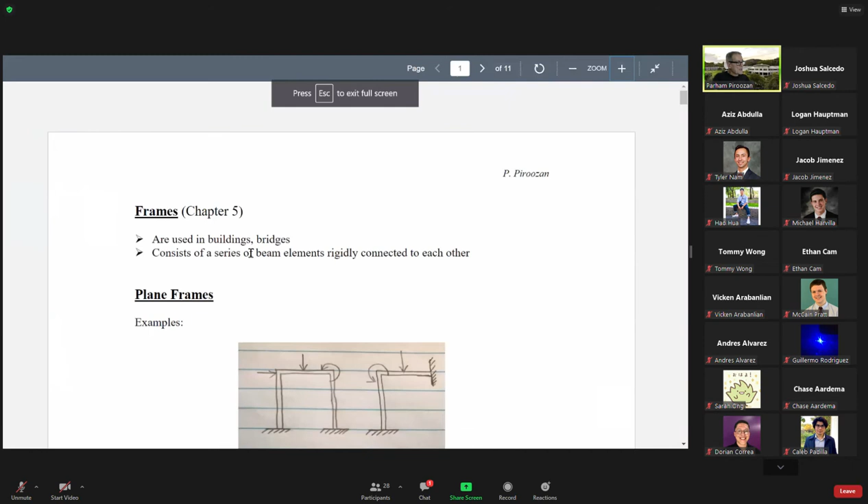So with this, let me go to modules. For this week, we have this, which is frames. That is what we are going to discuss today.

Examples are in buildings, bridges. What are they? Well, these are beams which are rigidly connected to each other, either welded or bolted. If it is bolted, of course, we can dismantle; disassembly is possible. But if it is welded, then we cannot dismantle this; it would be destructive dismantling of course. So this is a discussion sometimes in the civil engineering department, whether they want structures to be welded or bolted, where we add a gusset plate and then bolt them together.

More heavy duty loadings, you can apply the load anywhere. Unlike, for example, trusses where we are limited to applying the load at the joints, at the pins, here we can apply the load anywhere, moment or any type of loading, anywhere on the structure.

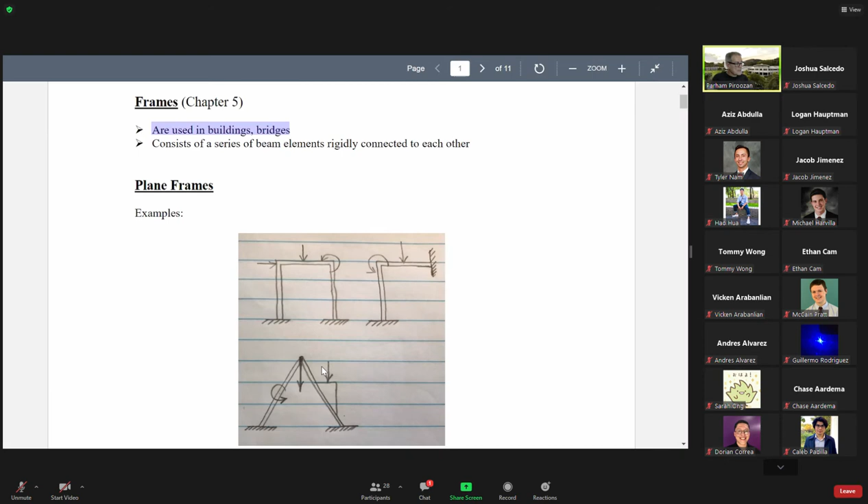If this load is in the plane of this frame, then it is called a frame simply. But if this load is perpendicular to this plane that you see, to the plane of this structure, then it is called a grid.

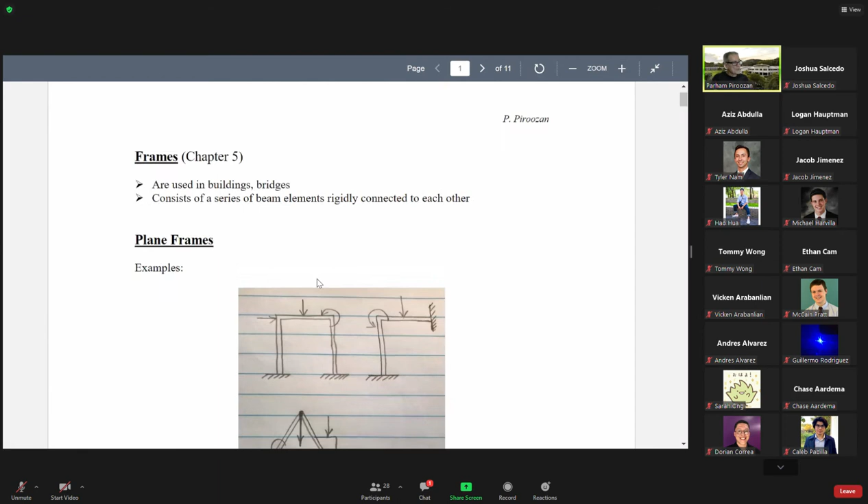So by frame, we usually mean that these loads are in the plane, but if it is perpendicular, it is called a grid. Today, we are going to look at finite element formulations for frame problems and look at an example problem. In the lab, we already used these frames, so today we are going to look at the formulations of what it was.

This has a lot of similarities actually with the method that we did for the derivation of trusses, the same pattern. This is one of these members.

It is oriented at an angle theta. We always measure theta counterclockwise positive. So this is positive.

Two coordinate systems are defined. One here, xy, this is the global coordinate system, and x prime, y prime, this is the local coordinate system. This coordinate system is attached to the element, goes from this node to this node.

Now, at each node, we have 3 degrees of freedom. We are applying a force in the x prime direction, call it F1x prime. A displacement associated with this force is U1 prime. There is a force also in the y prime direction. It is called F1y prime.

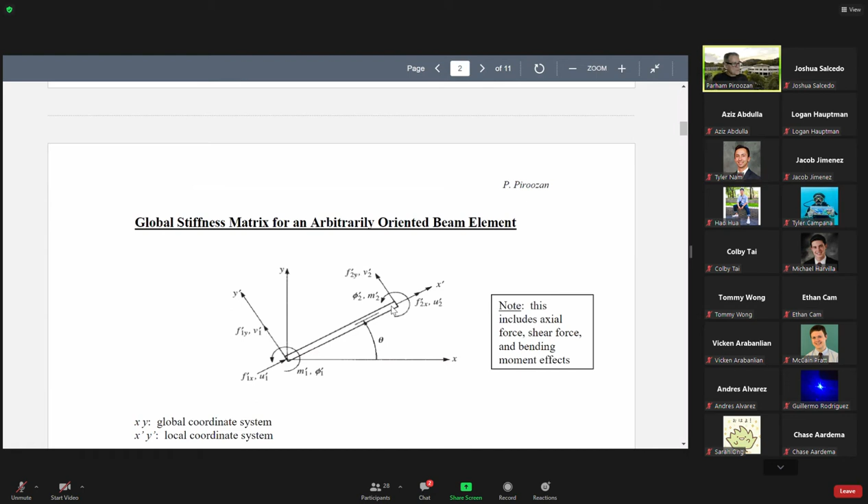You said 3 degrees of freedom per node, and there are 2 nodes. So our element stiffness matrix would be 6 degrees of freedom, 6 by 6. So it would be a 6 by 6 matrix.

This is for all beams in this section. This is, of course, we are talking about frames, but in general, yes, actually beams also, but in the finite element formulations, we consider 2 degrees of freedom: displacement, for the formulation, we did displacement in the y direction and also rotation. If you look back to the derivations for beam problems, we consider displacement in the y direction and rotation.

because this axial we had already done. So in our formulations, we didn't consider this degree of freedom, but we added this later. After we did our formulations for beams, then we added this one because this was for a bar subjected to axial loading. So we added this degree of freedom later. But in our formulations for beams, we consider 2 degrees of freedom, displacement in the y direction and rotation. But we added this one later. So yes, there are 3 degrees of freedom per node

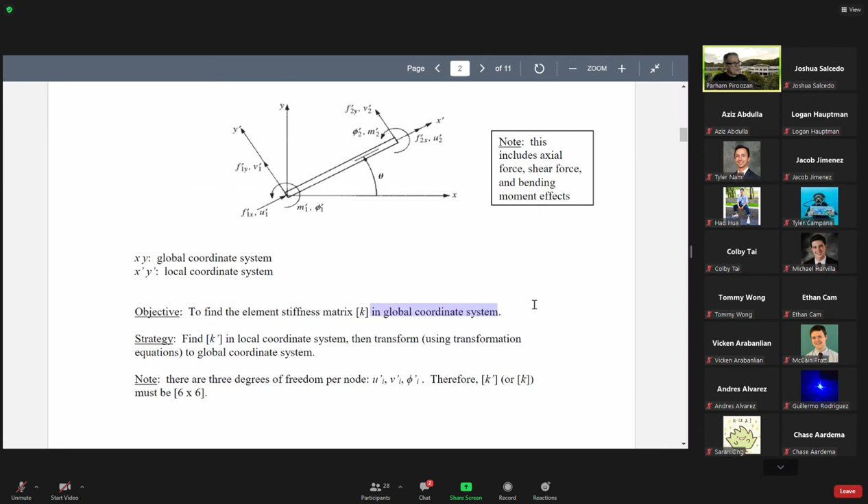for frame problems. Now, our goal is always, the objective is always to find the element stiffness matrix, element stiffness matrix, but in global coordinate system. We don't want it in local coordinate system, we don't want it in x prime, y prime coordinate system. We want it in xy, in global coordinate system.

So again, as usual, as what we did for trusses, we find K prime. Everything with prime, it refers to local. Everything without prime, it refers to global coordinate system. So,

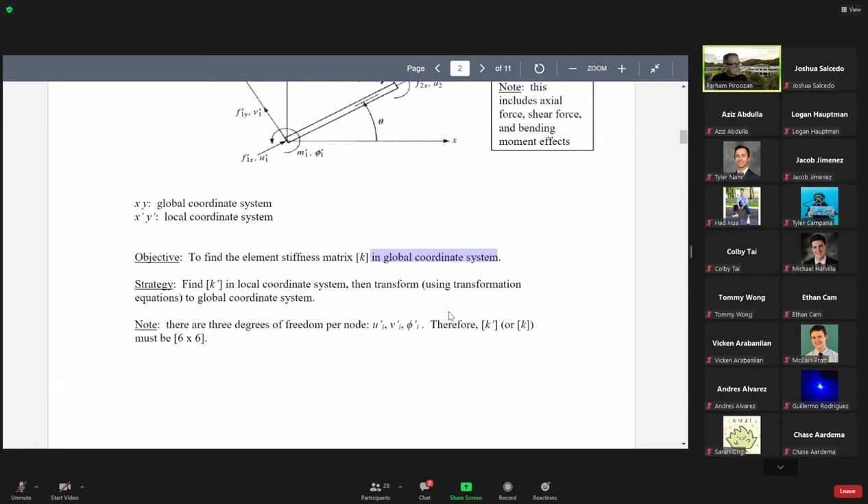well, in order to do this, let me see, I have this one. Our formula, as we can write, this is actually a beam element. So we can just write it F prime is K prime D prime in terms of its local coordinate system, the same as what we did for beams. But everything here is with prime.

We don't want this prime. We want to get rid of this and write it in global coordinate system. It means without these primes. Our job is to find this K prime, drop this prime and make it K. So we want this K actually.

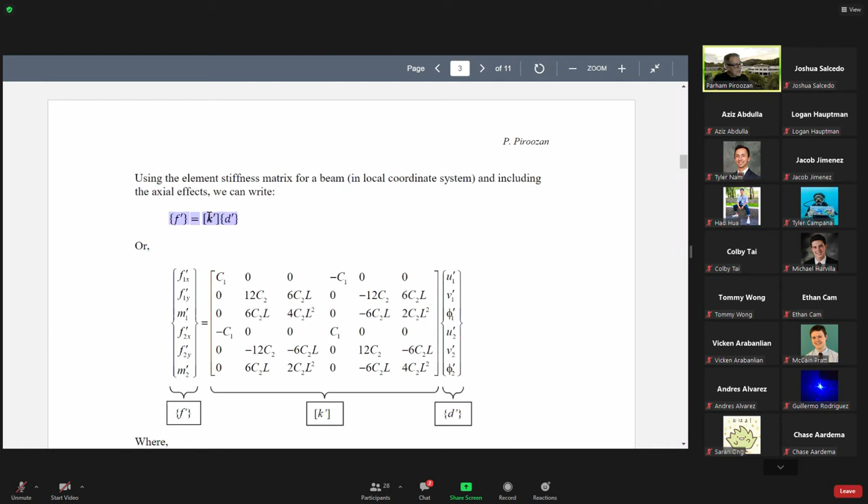So in order to do this, well, let's first use this formula that we have in local coordinate system. This is F prime is equal to K prime times D prime. F prime is forces in the force vector in local coordinate system. It is F1X prime, F1Y prime, M1 prime, and the same for node 2.

This is our element stiffness matrix in local coordinate system. Remember, for beams, we already did this before. It was, remember, EI over L cube. But here we are just simply adding F1X prime. So we are just adding this one. This is for node.

This would be U1 prime, V1 prime, phi1 prime, U2 prime. So as you see here, we are doing C1 minus C1 minus C1, C1. And then we have our C2, which refers to that beam EI over L cube that we derived before. But C1 is AE over L. So these are the substitutions we are using just to make it simpler. C1 is AE over L, and EI over L cube for C2.

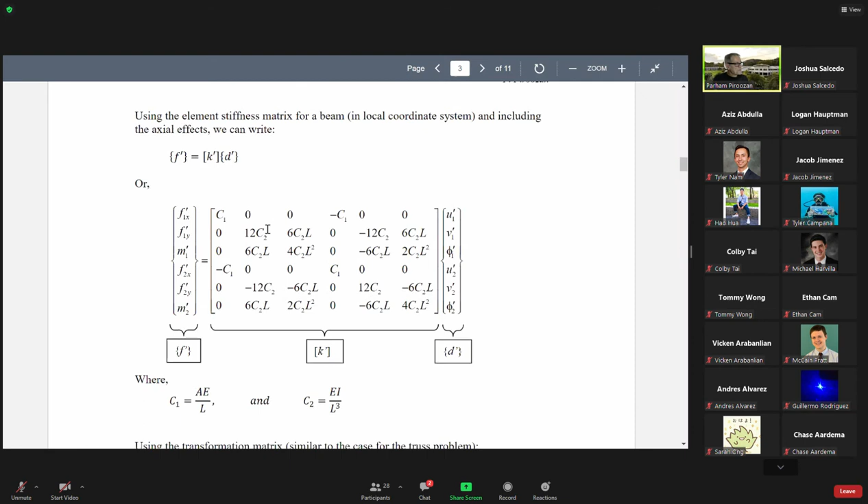So this would be the transformation matrix for these elements. Using this one, make this substitution here. You see, for F prime, use TF. For D prime, use TD. So we are getting rid of these primes. So let's do this: F prime is K prime D prime. For F prime, use TF, for D prime, use TD.

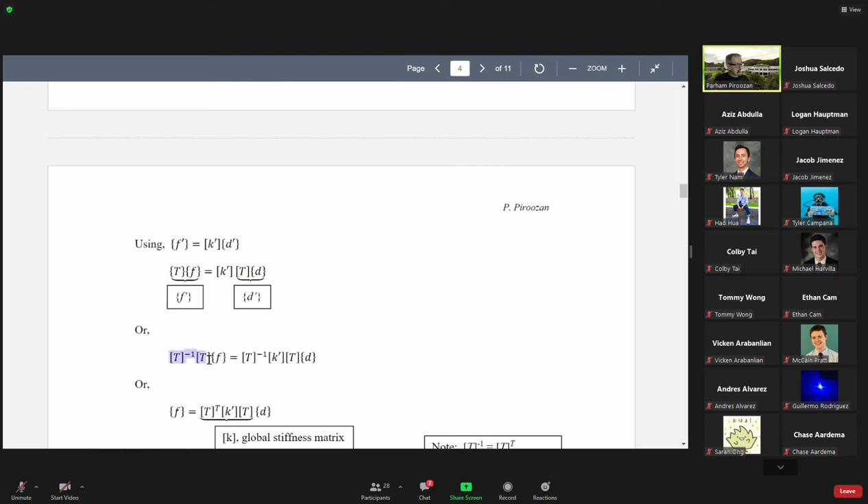That's what we get. Now, multiply both sides by T inverse. So this is T inverse TF, and this is T inverse K prime TD. This T inverse times T is what? Anyone? What is T inverse times T? Identity matrix. It's identity matrix. Very good, yes, it's identity matrix.

So we can just remove this one. So we have F is equal to T inverse K prime T D. But this T inverse, we don't like this inverse here, because inverse of a matrix is always some problems, because it's very time consuming. Finding the determinant, let's say, even with a 100,000 by 100,000 matrix, inverse is, if even the determinant is zero, then it causes ill conditioning and singularity.

So very time consuming also. But the good thing is that inverse of T is the same as its transpose. Remember, in the first activity, we did it for a simpler version of T, a 2 by 2 matrix, but it's the same thing. So this is orthogonal, this property is called orthogonality property. So we drop this inverse and write it as T transpose K prime T, and this is D.

That is our formula: F is equal to something multiplied by D. This something is called element stiffness matrix in global coordinate system. That's what we wanted: it is T transpose times K prime times T. That is what it is here.

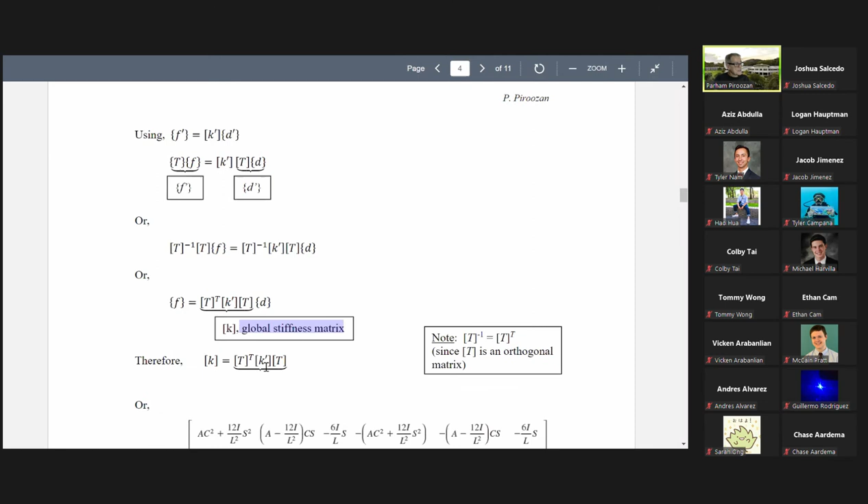Now, what is this T transpose times K prime T? We have everything here. This is T, so transpose of this one, times K prime. This is K prime, we start, this is K prime here, this. Times another T, here we find element stiffness matrix to be given by this.

We said this is a 6 by 6 matrix, and it is a 6 by 6 matrix. This is 1, 2, 3, 4, 5, and 6. And this is symmetric, so we are not rewriting this piece here, but we use this symmetry. Very important in finite element formulations and solutions. Symmetry always plays an important role in reducing the number of computations and memory usage. So this is what we wanted.

E, modulus of elasticity, length of the element, area, cosine of the angle that this member makes with the global coordinate system, I, area moment of inertia, sine of the angle, and everything else, area, cosine, I, sine, and everything else we can find.

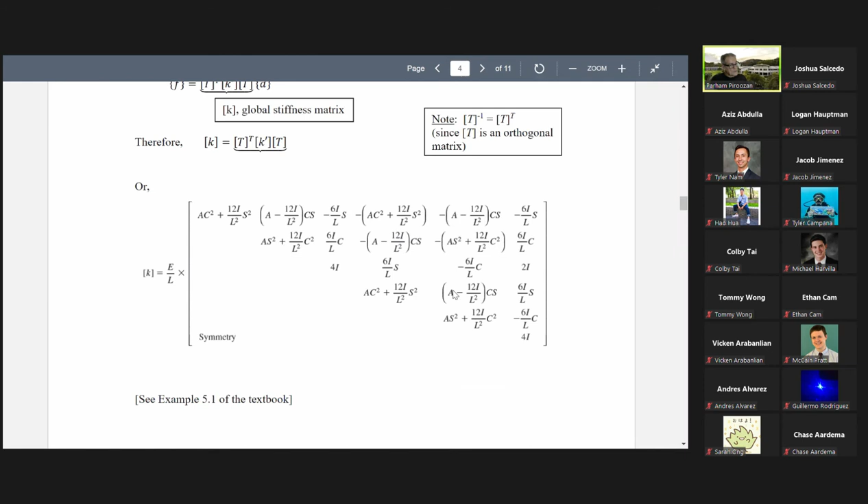And use this one. Once we have this in global coordinate system, we put them together by direct stiffness method to create the global stiffness matrix and then solve for displacements. All right, that's all I wanted to discuss. The rest is now solving, looking at an example problem. Any questions before looking at this example?

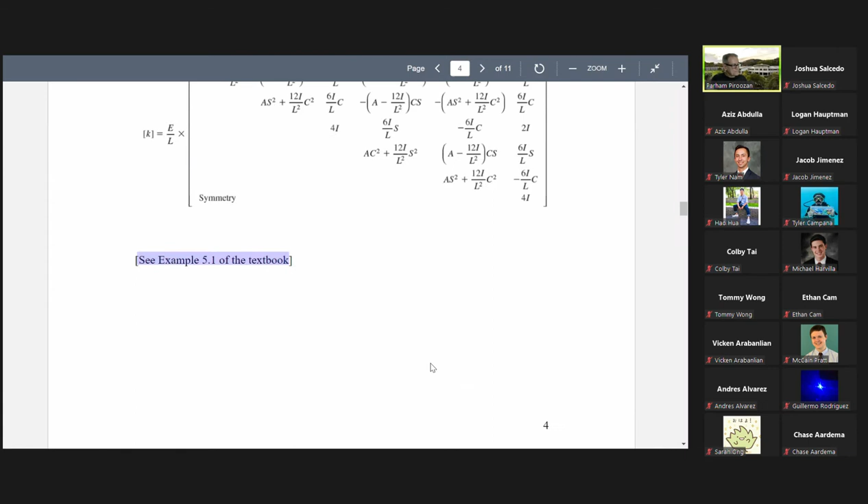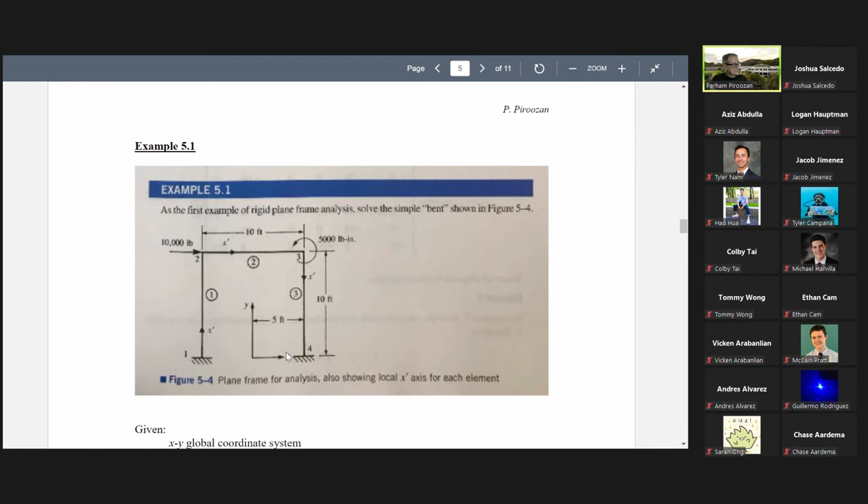No questions, so let's look at this example problem here. Node 1, 2, 3, 4. This is a frame like this. 10,000 pound force here, moment applied here. 4 nodes and 3 elements: element 1, element 2, element 3. X, Y, this is our global coordinate system.

This is subjected to these loadings. The question is, we are given XY global coordinate system, E modulus of elasticity is given, area, I for elements 1 and 3. So this element 1 and 3, I is 200. For element 2, this is 100 inch to the power 4. So this area moment of inertia.

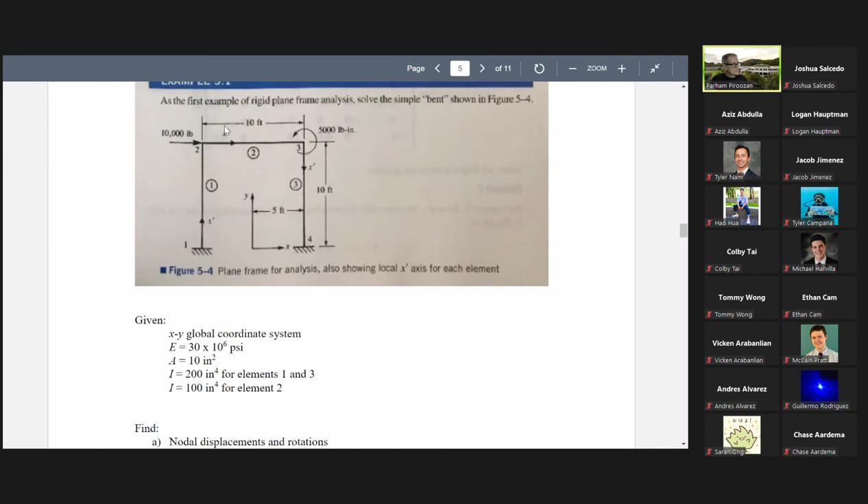So this is the frame. The question is to find the nodal displacements and rotations, and also we want to find forces and moments in each element.

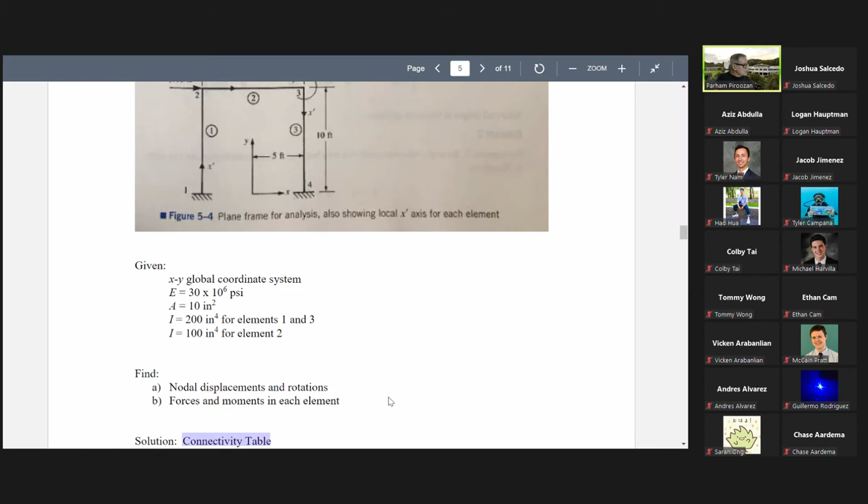To solve this problem, the first item is to create the connectivity table. Have your paper and pencil ready. I want you to be active, use your time here. Write this down: connectivity table. You have 1 minute. Create the connectivity table and let me see what you do.

All right, let me also, I have this camera here. This is node 1, 2, 3, 4 here, and we have the connectivity table. Node, we have here element, node I to node J, and angle theta.

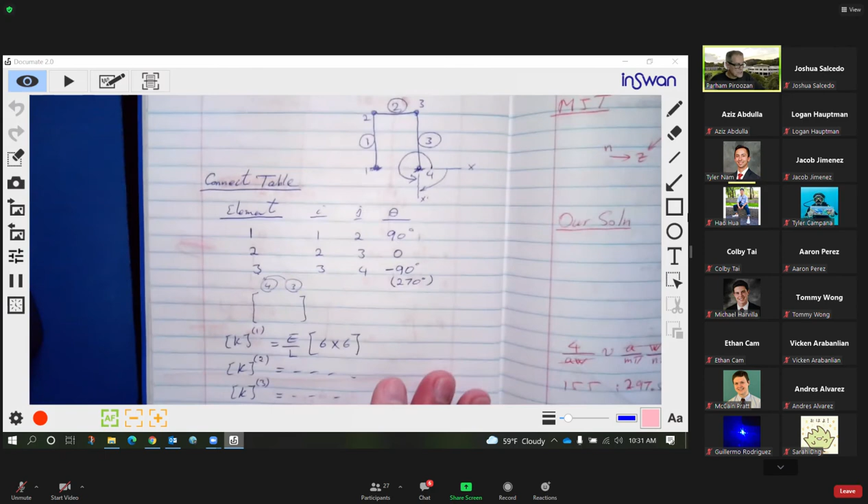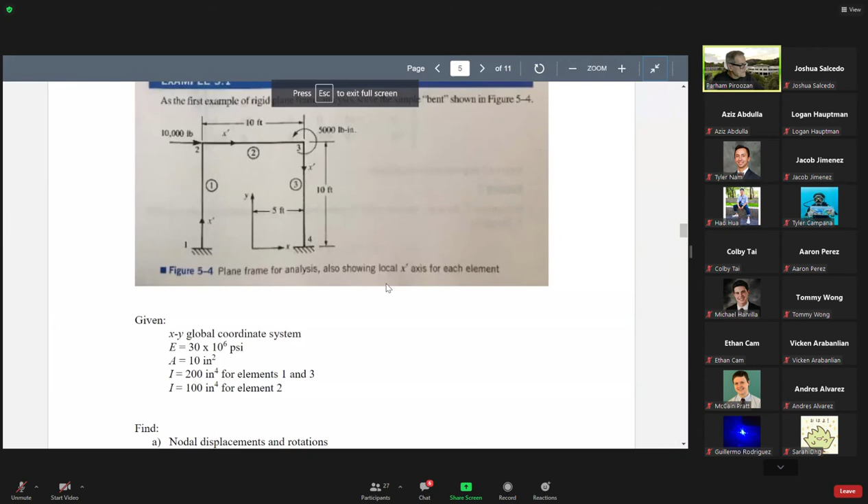All right, let me go back to Canvas, and now we know where we are going. So that was the connectivity table. We talked about this. I used 270 degrees or negative 90, the same thing. We need to, for each element, element 1, this would be K1.

All of these parameters, angle theta for element 1, we said it is 90 degrees. So cosine of 90 is 0, sine of 90 is 1. And we have everything else. We can create K1, degrees of freedom, write them down here so we know the addresses: U1, V1, Phi1, U2, V2, Phi2. This is the global element stiffness matrix for element 1 in global coordinate system, of course.

This is this one. Do the same thing for other elements. For element 2, we said theta is 0 degrees, cosine 0 is 1, sine 0 is 0, and other parameters, this is K2, degrees of freedom from node 2 to node 3. Element 3, theta is negative 90 degrees or 270 degrees, cosine is 0, sine is negative 1. This is the stiffness matrix for element 3 in global coordinate system, degree of freedom from nodes 3 to 4.

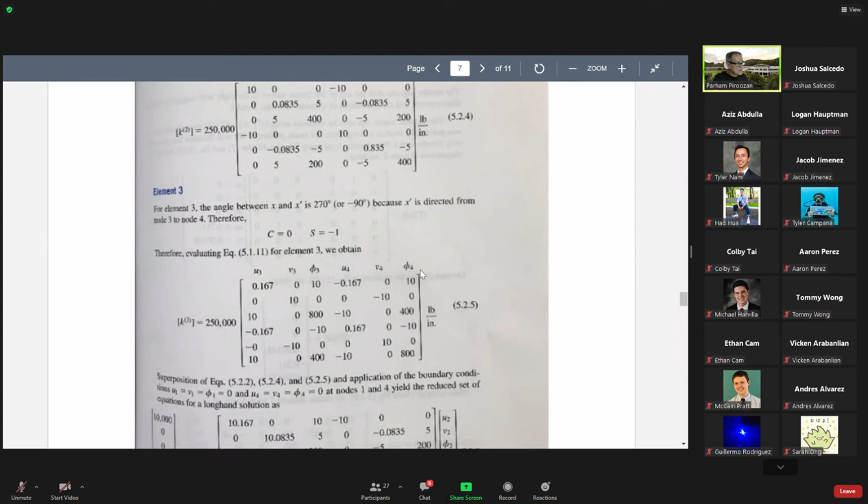And then the global stiffness matrix would be, as what we discussed, 12 by 12, but it's a very large matrix to write. We can apply also boundary conditions: U1, V1, Phi1 are 0, and U4, V4, Phi4 are 0. These are the 2 fixed nodes, and applying them, we get this one.

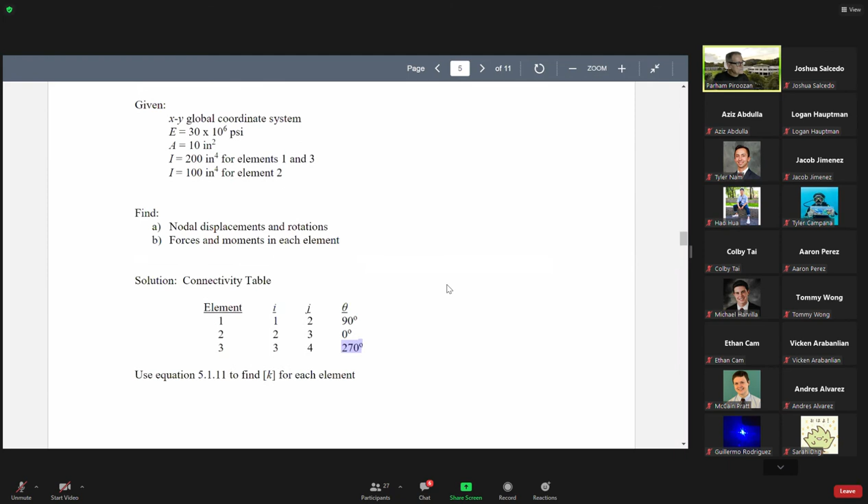Now, I need to write the force vector for this problem, at node 2. This force is positive or negative, I should write in the force vector? Positive. You're right. This is to the right, according to our sign convention, it is positive.

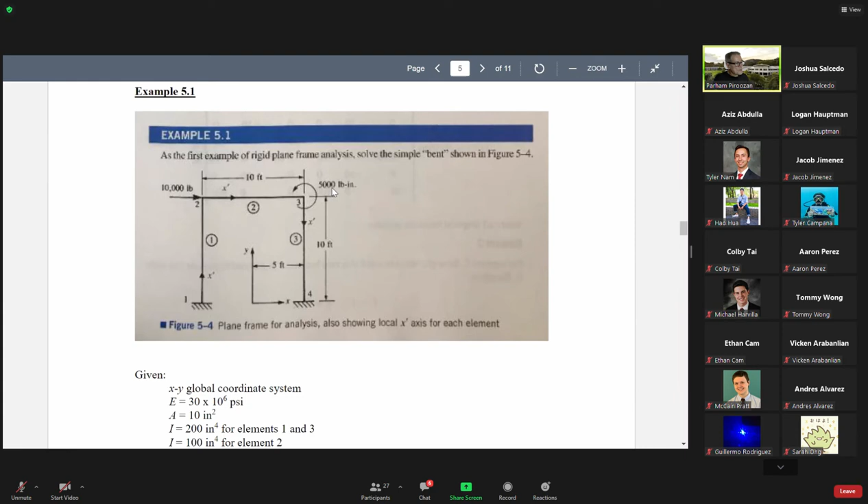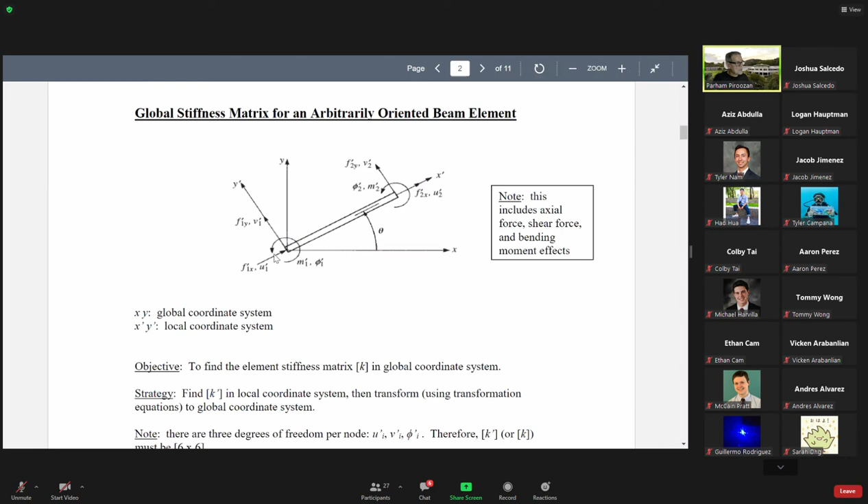This moment, should I write it positive or negative? I believe positive, because it's counterclockwise. You're right, it is counterclockwise positive. According to our sign convention, always for beams and frames, counterclockwise is positive. So yes, this moment which is counterclockwise is positive.

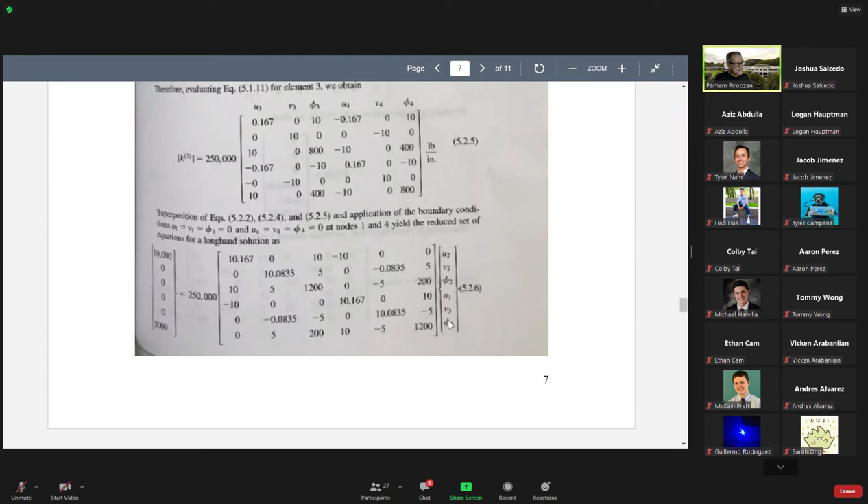Therefore, plugging everything in, this is 10,000 pound force that we are applying, everything else 0, and there is a moment of 5,000 pound inch. This is the system that needs to be solved for these displacement vectors, 6 of them: U2, V2, Phi2, U3, V3, Phi3. Solving, that is what we get. These are the displacement and rotations at this node.

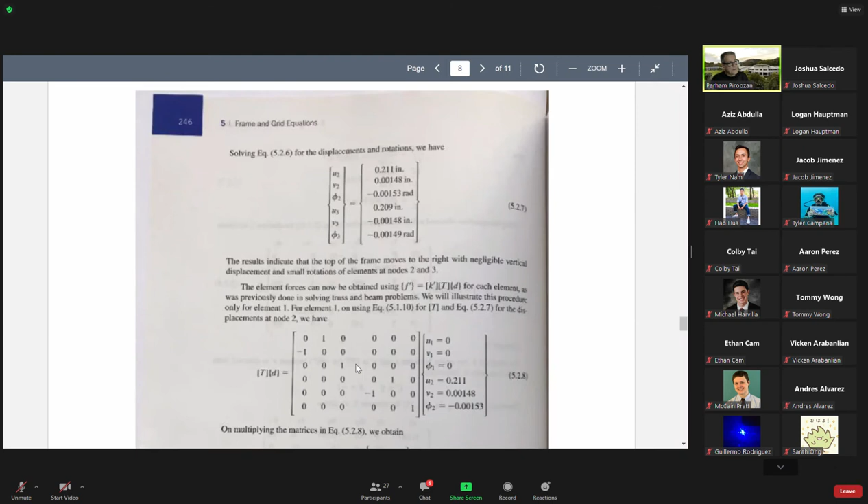That's part A of the problem, finding displacement and rotations. Next step is to find the forces and moments in each element. Once we have this, everything else is now post-processing, not a big deal. But remember, again, like what we did for trusses, we need to find the displacements in local coordinate system to be able to find the forces and moments in each element, because forces and moments in each element are written in terms of local coordinate system.

But these displacements are in global coordinate system, so we have to find them in local coordinate system. We can do this easily. TD, remember we said D prime. Let me go back and show you. Remember, this is D prime equals T times D.

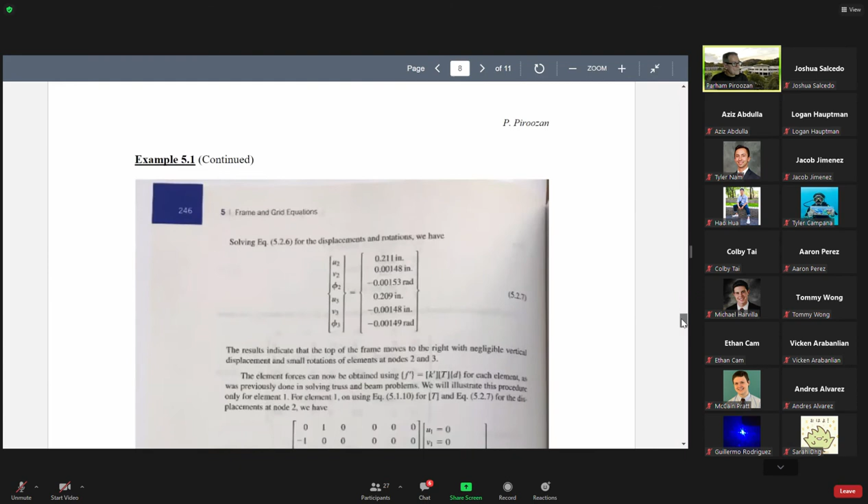We found the displacement in global. This is the transformation matrix. Multiply, we get this displacement in local coordinate system. So here it is. This is the transformation matrix for element 1.

Theta is 90 degrees, so cosine 90 is 0. So this is 0 and sine it is 1. So this is the transformation matrix, and displacement, it goes from node 1, it is fixed, everything is 0, and node 2 that we have, for node 2, we have the displacements here. So these 3 items...

...go here. These are the displacements in local coordinate system, and then now multiplying it by K prime, TD, this is TD, K prime element stiffness matrix in local coordinate system. It is this one, multiplied by these displacements in local coordinate system. Here we find forces in element 1 to be like this.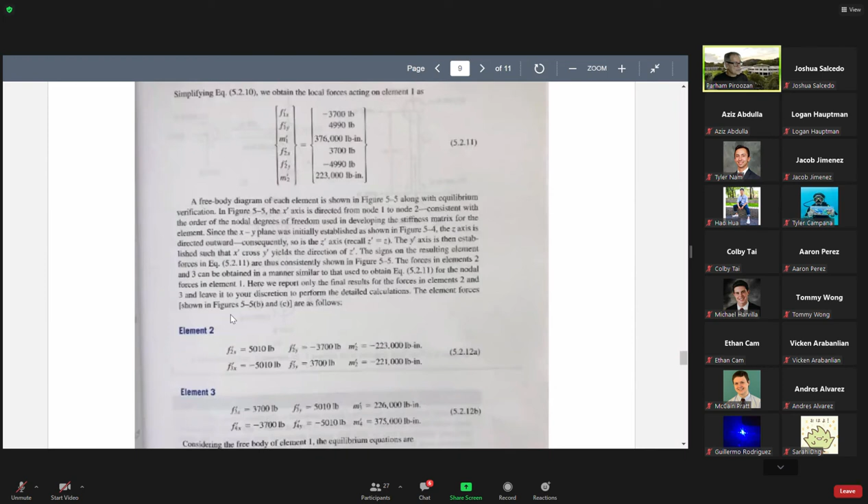This is F1 X prime, F1 Y prime, M1 prime, F2 X prime, F2 Y prime, and M2 prime. Everything you see in terms of primes, these are in local coordinate system. Do the same thing for elements 2 and 3, not a big deal. The same procedure. We have the displacement for element 2 and element 3. Similarly, we get these forces and moments in elements 2 and 3.

Now, a very important question. Any questions you have? Because I have a question for you. Any questions you have?

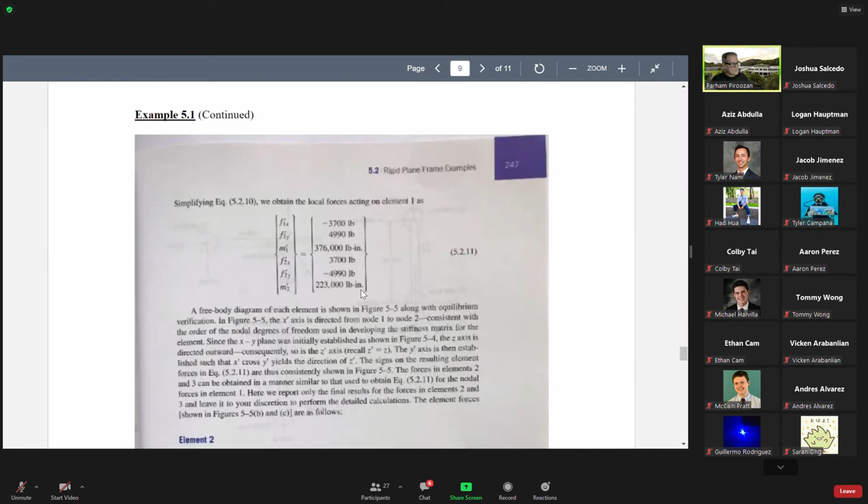All right, no questions. What I want you to do, very important practice here, you have your paper and pencil. These are the forces in element 1. I want you to draw element 1 and show these forces acting on element 1.

In practice, in industry, we do these things, and then we need to show them on the free body diagram, and then we send it to other departments. Let's say we send it to civil engineering so they can design the foundation, because node 1 is attached to the foundation, so it is attached to a support. They need to use this to design the foundation, the pedestal, and the reinforced concrete to handle this load.

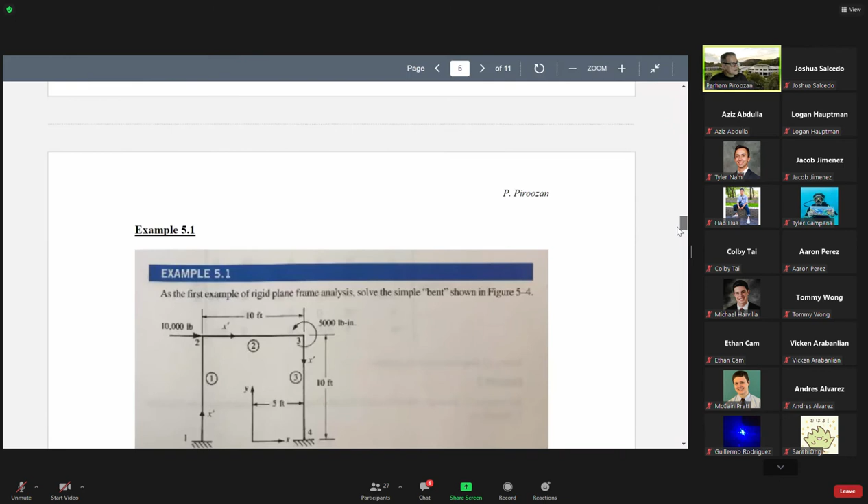I need you to draw this element 1. This is from node 1 to 2. Draw this element, just element 1.

Do we include the 10,000 pound force acting at node 2? No, this is at the node here, not this one. This is just the element itself. This element is attached to the node. This load is at the node. So just draw this free body diagram of this element.

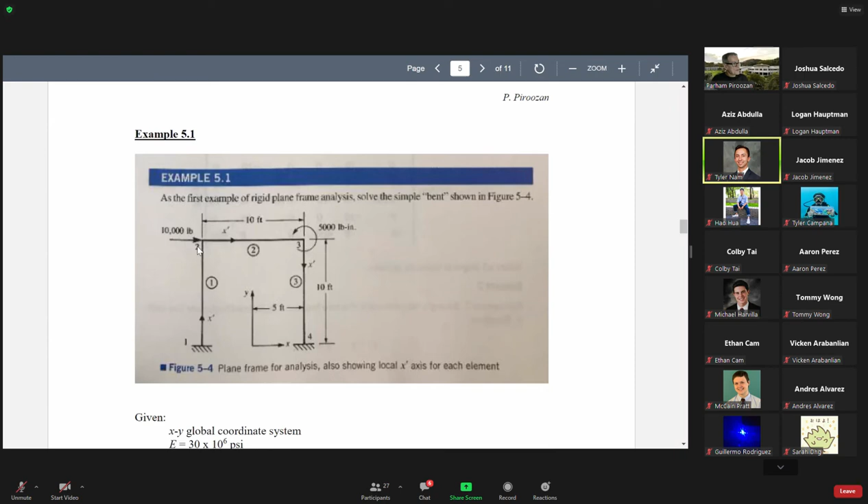Node 1 to 2. And show these forces that we found acting on this element. Show them here, because then we have to make sure that equilibrium is satisfied. Important practice, 2 minutes, show all these forces. Let me see what you have done.

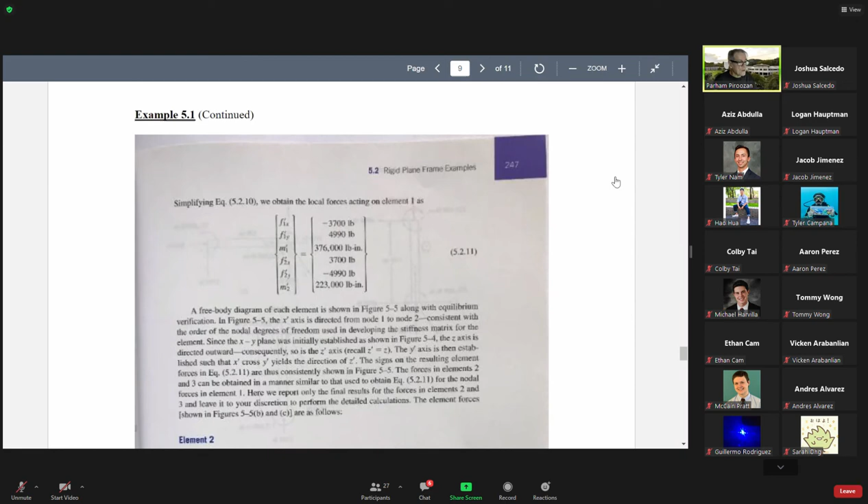All right, I have to show the camera. Now, this is for node 1, node 2. Well, I cannot show the numbers and the camera at the same time, only one at a time. So let me, you have the numbers. Let me see, what did we have for F1x prime? We got negative 3,700.

You see, this is node 1, node 2, and this is our x prime axis. Do you see it? Now, our x prime axis is going upward, and this is our y prime. Remember, this is in the local coordinate system. So this is 1, 2, this is element 1. F1x prime, we found negative 3,700 pounds, along our x prime axis. Upward is positive, so this is 3,700 pounds.

It is the force. F1y prime is positive to the left here. We got 4,990, so there is a force of 4,990 pounds. And there is a moment of 376,000 pound inch. What do I do, clockwise or counterclockwise? Which one should I do? Counterclockwise, very good, because our sign convention is counterclockwise positive. So this is 376,000 pound inch.

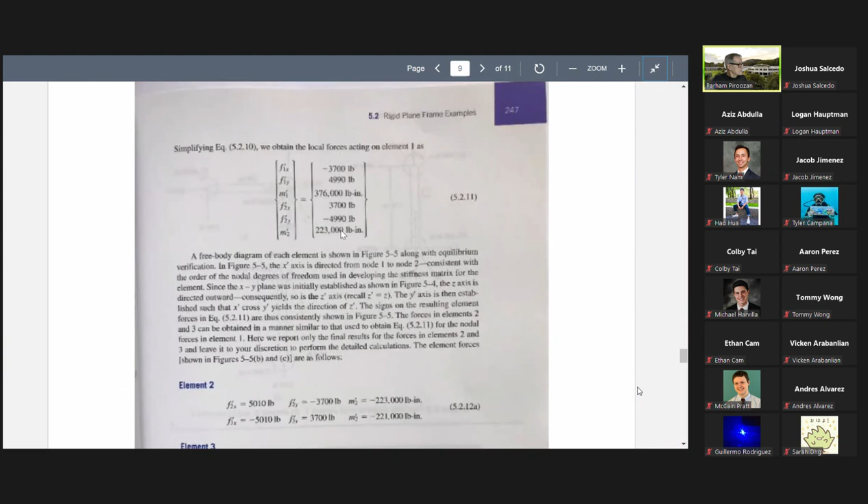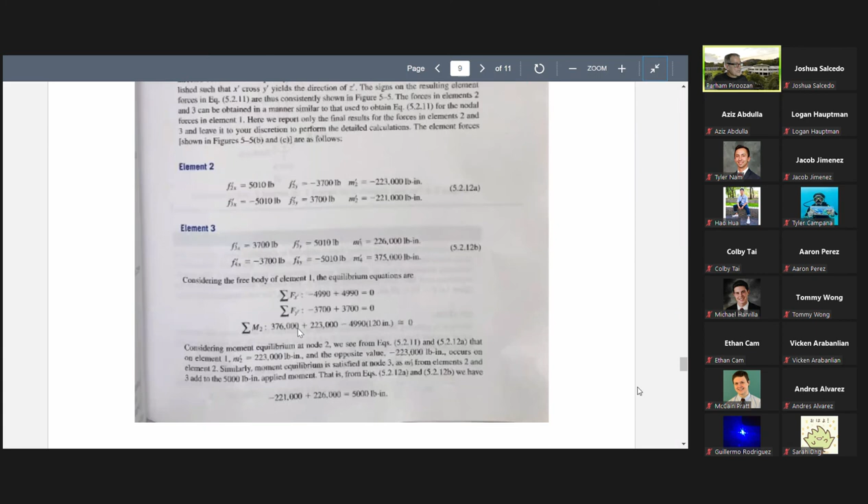Do the same thing for elements 2 and 3 - the same procedure, we find forces and moments in elements 2 and 3, and then also check equilibrium is satisfied, like what we did for element 1.

And these are also shown here - these are the forces and moments actually in element 1, this is for element 2, and this is for element 3. So we have all of them here. I think in addition to all of this, I added one more item here: equilibrium of node 3.

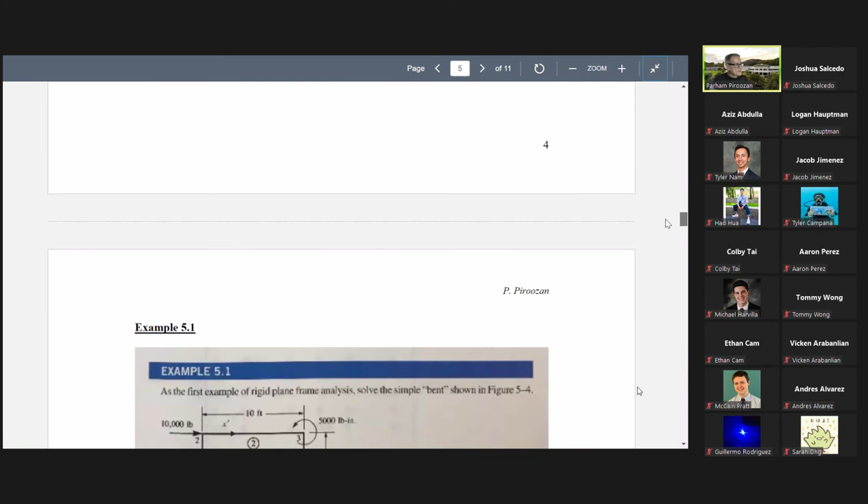What we looked at, we showed the equilibrium of each element, but for node 3 - if you go back, node 3 is here, connecting element 2 and 3. So this node 3, some part of this comes from element 2, some part of this loading comes from element 3. So when we want to draw the free body diagram of the node itself, there is a moment, concentrated moment.

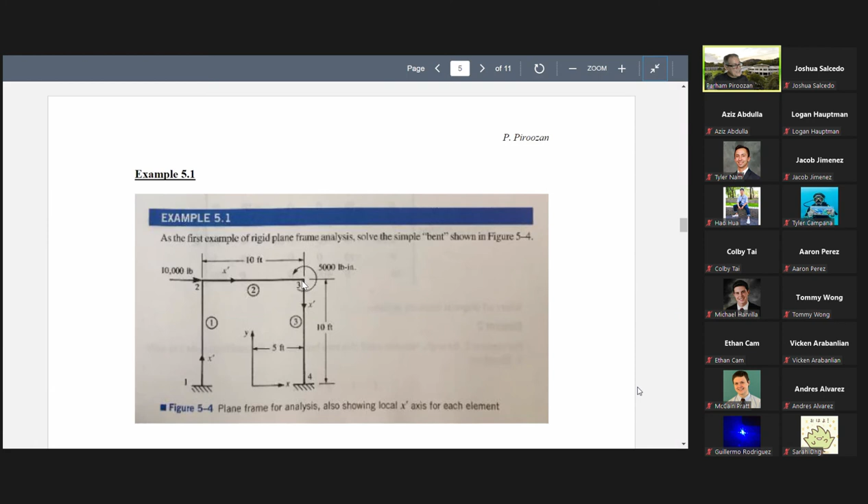At the node, we need to show this 5,000 pound inch, and the forces and moments in each of these two elements. But pay attention, the forces we showed were the forces that the node applies to the element. So the element applies forces and moments in the opposite direction to the node.

So here, going back to this, first of all, this was a concentrated 5,000 pound inch moment. Now, from element 2, I have shown it in red, for element 3, it is in blue. For element 2, these are the forces and moments.

Look at element 2, for example. This axial force is 5,010 pounds, to the left. This is the node applying this force to the element. The element applies the same force but in the opposite direction to the node - so 5,010 would be to the right now. This is what this element is applying to this node.

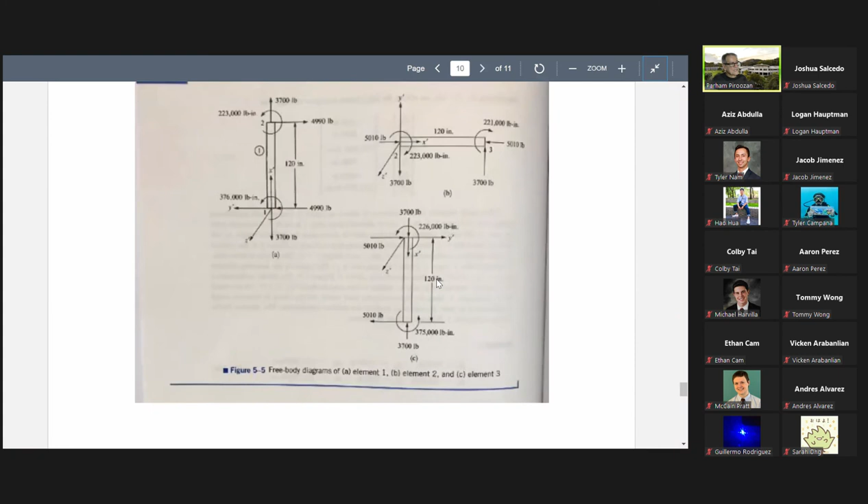And the same, for example, here, there is a force of 3,700 pounds that the node is applying upward. So this element applies in the opposite direction, 3,700 downward to this node. And the same for moment - let me also show you.

This moment is clockwise, 221,000, so it would be in the opposite direction - 221,000, but counterclockwise - that this element applies to this node. I showed it at a distance so it is clear.

The same, if you look at element 3, these are also the forces and moments that element 3 applies to this node. So, one minute - check, is equilibrium satisfied here? Is node 3 in equilibrium?

Yes. Anyone agrees with your friend? Yeah, it is. You are right - in the horizontal direction, 5,010 to the right, 5,010 to the left, the same amount, 3,700 and 3,700, and for moments, 221,000 and 5,000, both counterclockwise, making 226,000. With this 226,000, yes, it is in equilibrium.

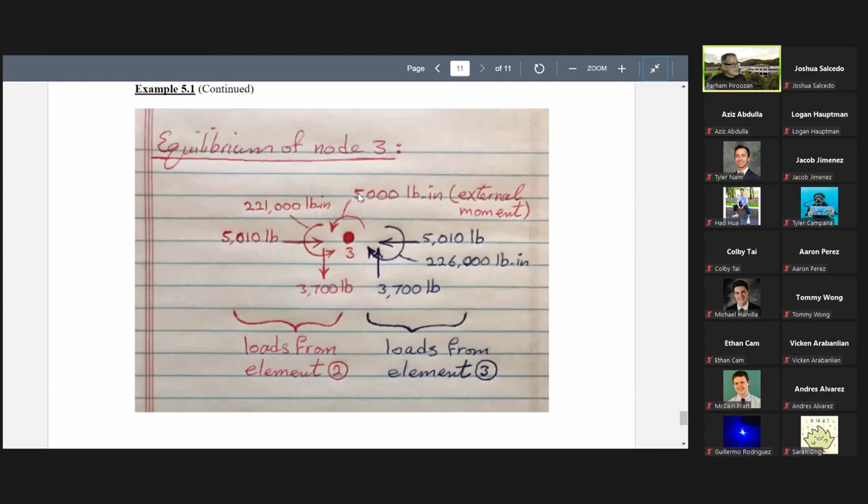And these are also the forces that act on node 3. I just wanted you to pay attention to the forces at the node and also for the elements. All right, any questions, anyone?

For element 2, if we tried to do this, would we have to include the 10,000, for node 2? That's right, good question. Yes, for node 2, you need to include this 10,000 applied to the node - so you apply it to the node and then make sure equilibrium is satisfied.

You want to do this? That would be your practice right now - draw node 2, and show all the forces acting on it. This would be 10,000 - this is node 2, this is 10,000.

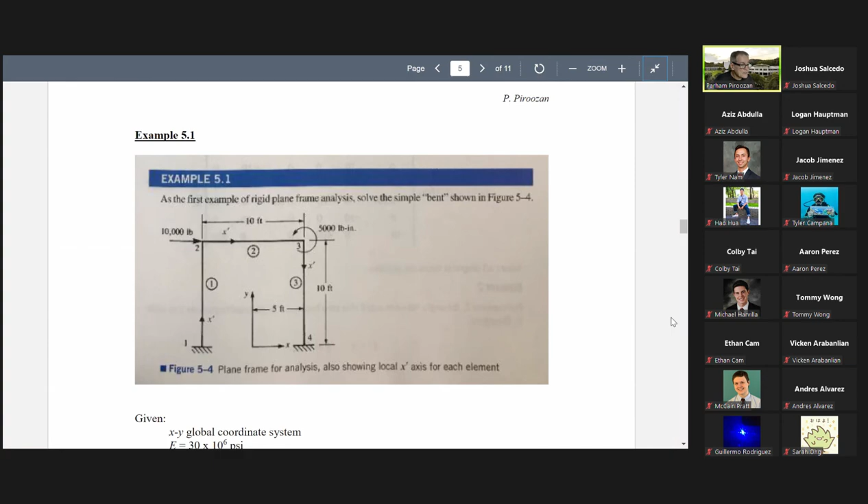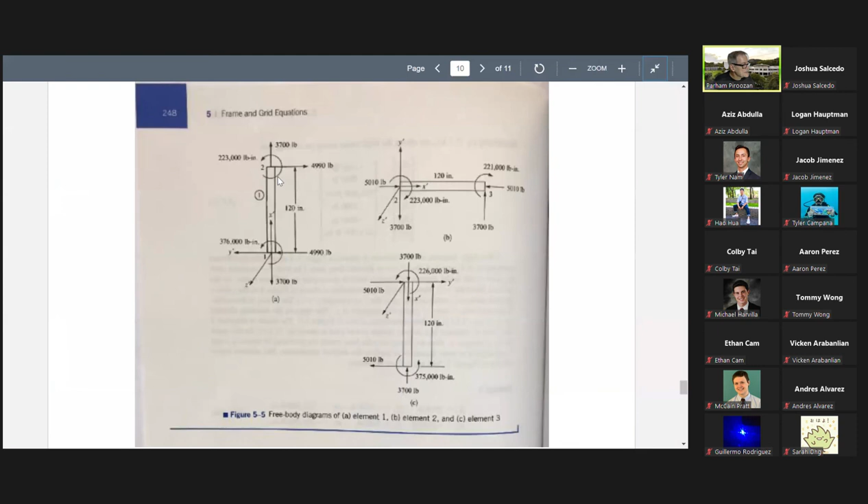10,000 pounds is applied here. This goes from element 1 and 2. Look at these items, 2 minutes. Draw the free body diagram of node 2.

Draw free body diagram of node 2, show all the forces acting on node 2. All right, 2 minutes. Let me show my camera. This is 10,000 pound force. This is node 2.

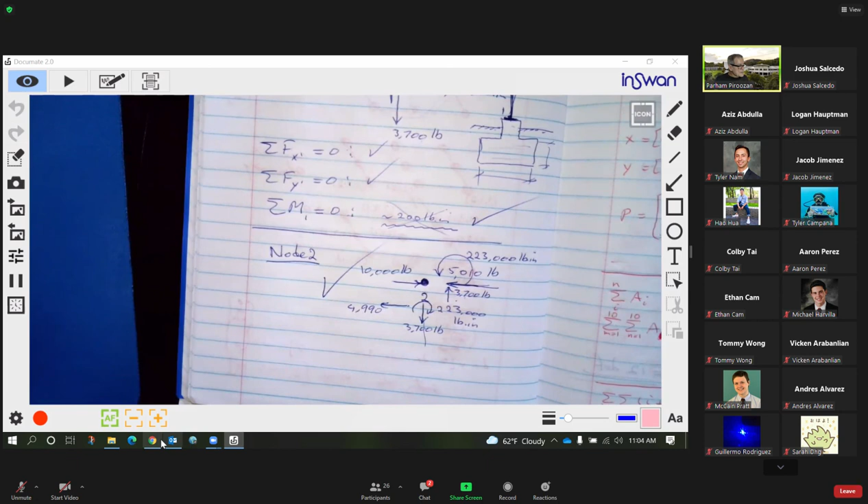Let me go back to the canvas. That was our discussion. I think I don't have anything else on frames. Any questions about what we discussed today?

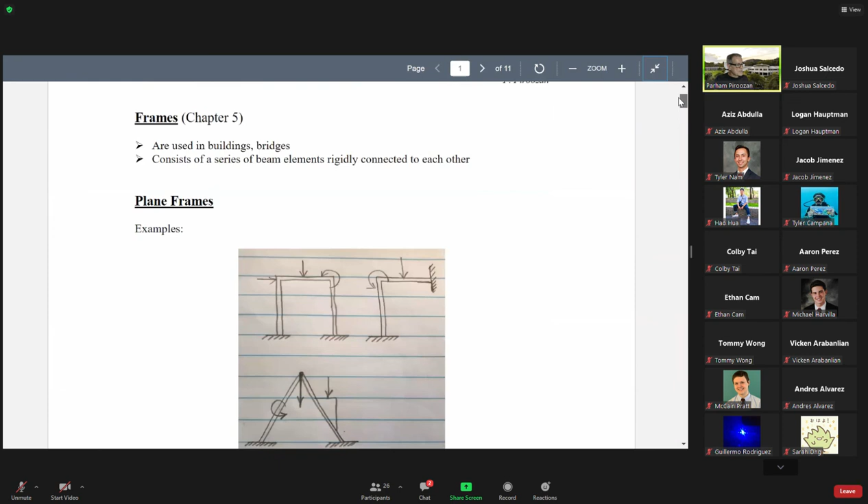No questions. You see, all of these that we were discussing so far were line elements: we used for a bar subjected to axial loading, then we talked about trusses, then beams, then frames. They are all line elements. As you see here, it's just one line. The element is a line.

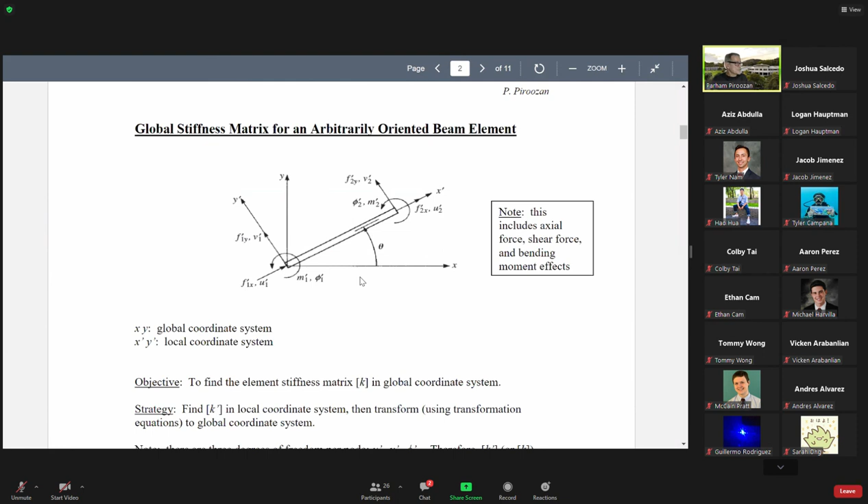But from next week, we are going to talk about continuum elements. They are not line elements, they are two-dimensional and three-dimensional elements. So the simplest one would be constant strain triangular elements. Next week, we are going to start with that triangular element and then continue with others, quadrilateral, and so on and so forth.

The test, the last topic, would again be a continuation of what we did. 7 problems, 7 questions will be on this test. It would be at 10 o'clock.